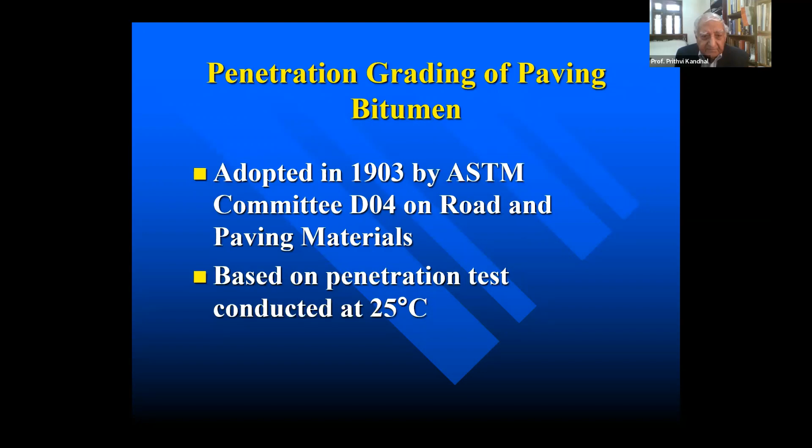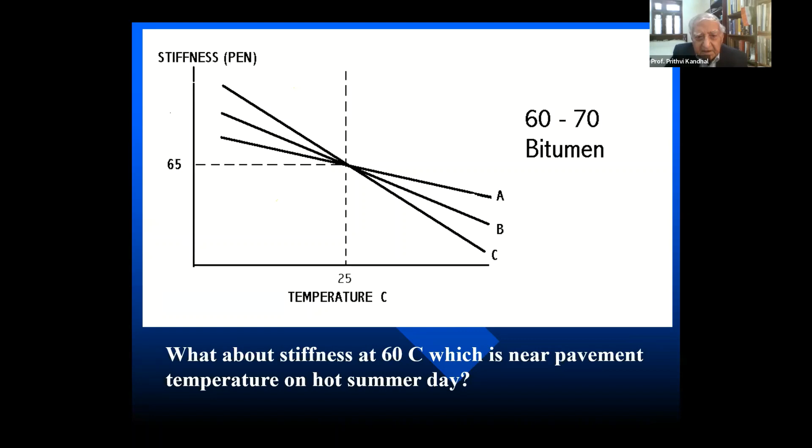So in the late 1960s, the ASTM originally proposed these, let's say, viscosity grades. Here is the viscosity grade. So AC5, AC stands for asphalt cement, which we don't use in India. In India, we use bitumen. So AC5 has a viscosity of 500 plus minus 20%, which gives us a range of 400 to 600.

AC10 has a viscosity of 1000 poises with plus minus 20%, which gives us a range of 800 to 1200. And AC20 is 2000 poises plus minus 20%, 1600 to 2400, and AC40 is 3200 to 4800. So again, you can see here there is a gap between these viscosity grades. So there is no dispute, no problem.

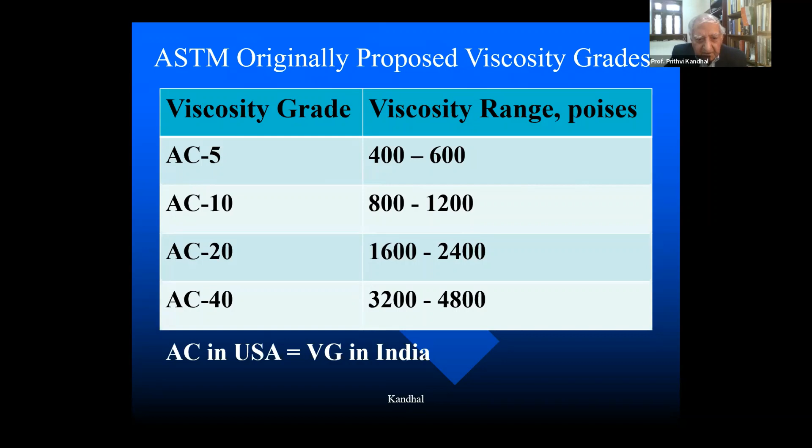So here you can see what happened after the ASTM originally proposed these grades, AC10, 20, and 40. There were 4 states in the southeastern United States right here, Florida, Georgia, Alabama, Mississippi. Now, they were supposed to use AC40. In India, we will call it VG40. We didn't want to use the term AC, we just said VG, viscosity graded. So they did not want to use AC40, whereas AC20 was for most of the United States.

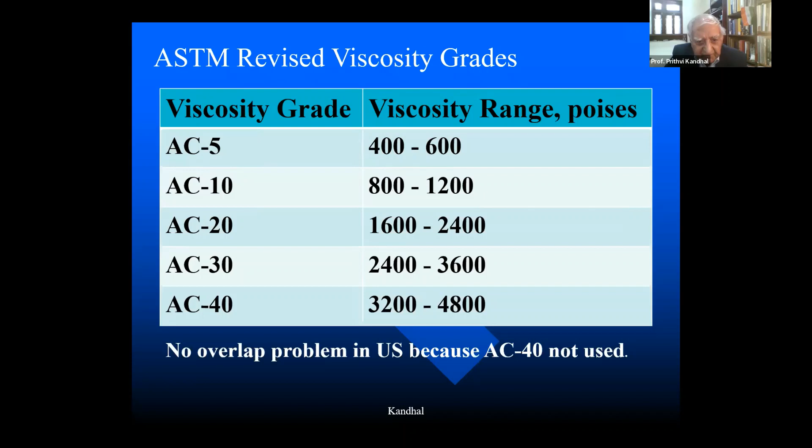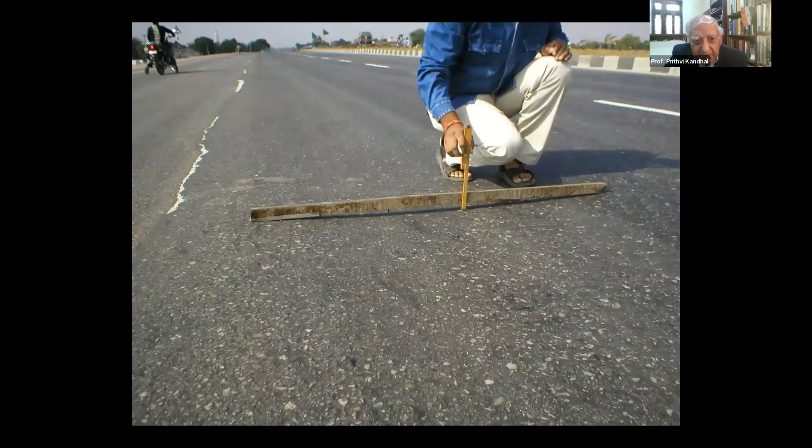Next. Okay, here you can see there was a lot of rutting. Rutting was as much as 40 millimeter in many of the cases. So in this lane, it's being measured up to 40 millimeter. Next.

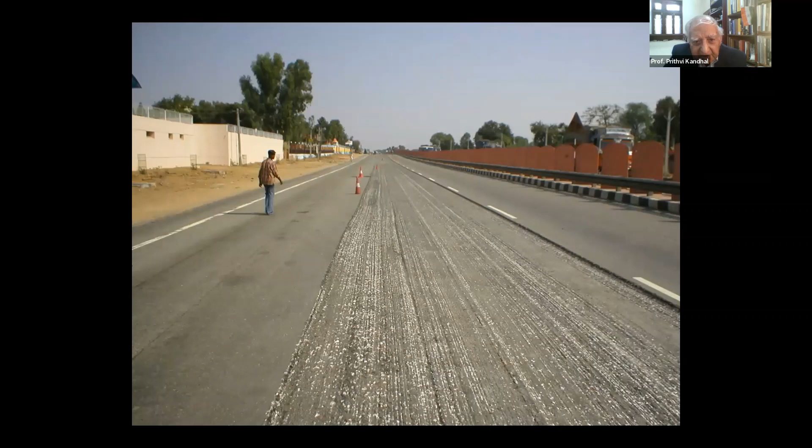Here you can see because of the rutting, this middle lane of the 6-lane highway, there are 3 lanes on this side, has to be milled off. In India, unlike other countries, most of the heavy traffic, buses and trucks, ply in the middle lane, which they are not supposed to do. So that's where the problem always occurs. So in this middle lane, this rutted pavement was milled off and then replaced. Next.

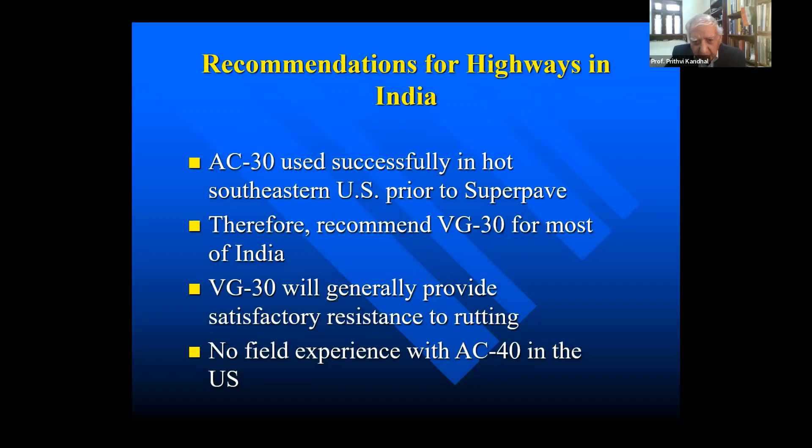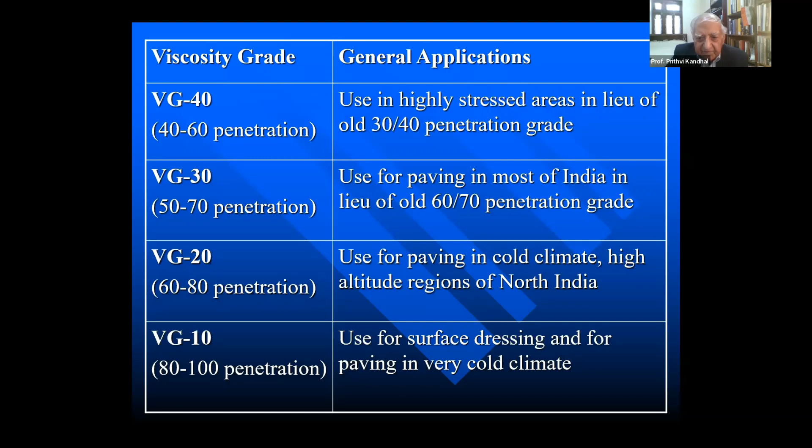So this is what I recommended here: viscosity grades and general applications. I recommended for India that VG40 can be used in highly stressed areas in lieu of 30-40 penetration grade. VG30 can be used for paving in most of India in lieu of the old 60-70. VG20 is used for paving in cold climate, high altitude regions, and VG10, which replaced 80-100 penetration, is used for surface dressing and for paving in very cold climate. So that's what I recommended for the viscosity grading used in India. Next.

So that happened in 2006. Then came a shocker in 2012. The Indian Roads Congress revised their guidelines for the design of flexible pavements. It's called IRC 37. It was revised in 2012, and I'll now talk about what the revision was and what kind of impact it had on the viscosity graded bitumen.

Next. So in IRC 37, they included a table of VG grade versus Resilient Modulus MR. Now the Resilient Modulus is used for structural design of bituminous pavement, especially the thickness of the bituminous pavement. Higher the Resilient Modulus, lower is the thickness of the bituminous pavement.

So in that table, which they came up with for the first time in 2012, they said the Resilient Modulus MR of mix with VG30 is 1,700 MPa or megapascals. The mix with PMB is 1650. The PMB is always lower, although it has much more strength than the neat bitumen. Mix with VG40 was 3000 MPa. So look at the difference here, VG30 and VG40.

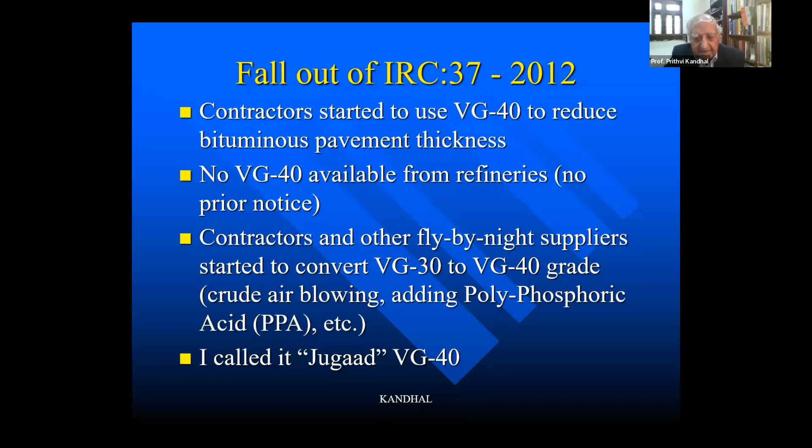So because of that, the National Highway Authority of India had an open house on this IRC 37 design of flexible pavement, and they invited me to make a presentation because I was resisting quite much, making a lot of hue and cry. So I recommended to immediately stop the use of Jugaad VG40, permit only the refineries which produce VG40, and I also made a case to not base Resilient Modulus on viscosity alone.

It is technically incorrect. There are 6 other mix variables, such as amount of fines, bitumen content, air voids, etc., which can overshadow the effect of viscosity on MR, Resilient Modulus. The table which I showed you was technically incorrect, but they went ahead anyway, and they are still using it. Next.

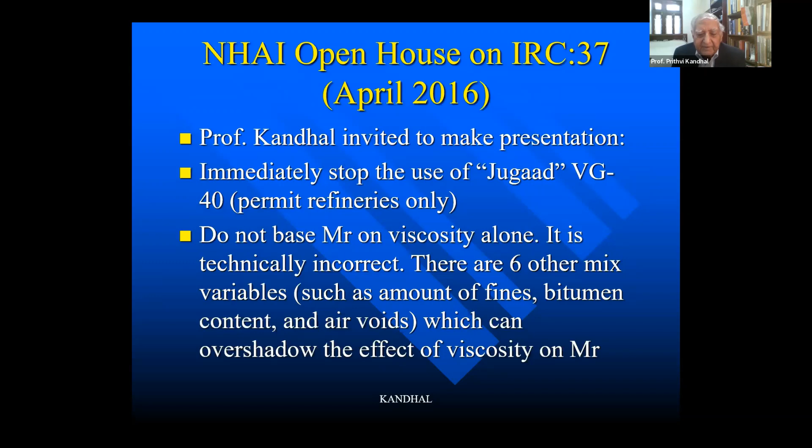So I also recommended to use only one Resilient Modulus of 1700 megapascals for all binder types. That was the same as we were using before 2012, and is also used in the US. They also use the same one Resilient Modulus. So I said only one. Don't differentiate between VG30 and VG40 or polymer modified bitumen. I also raised the point that there are only 2 or 3 laboratories in India which can actually determine the Resilient Modulus, which is a very complex ASTM test.

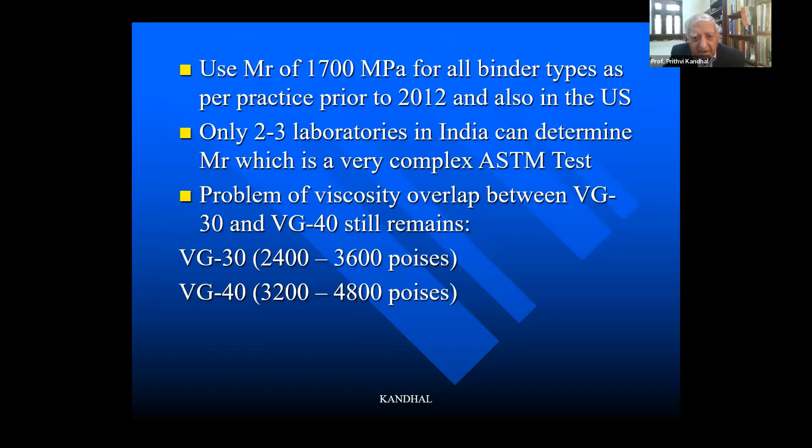And then we have the problem of viscosity overlap between VG30 and VG40. As you can see here, the VG30 has a range of 2400 to 3600, VG40 is 3200 to 4800 poises. So there can be a bitumen which will satisfy both VG30 and VG40. So how can you use different Resilient Modulus for VG30 and 40? So I raised that point quite much in that open house. Next.

So I just want to show you this slide again, that VG30 is 1700 MPa, VG40 3000. Lot of difference here, and which is technically incorrect. Next.

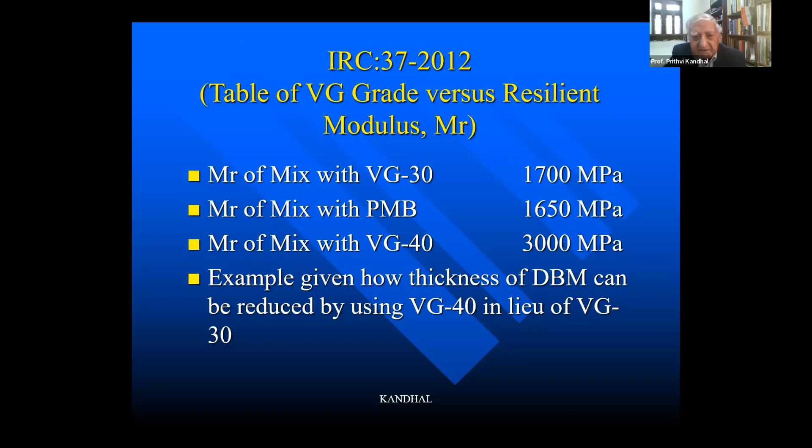So the current situation in 2022 is that we are still living with the viscosity overlap of VG30 and VG40. So how can we use different Resilient Modulus? Even if there is no overlap, if the viscosities are very close, it still renders the Resilient Modulus values of no value. Unreliable, impractical resilient modulus values are being used for pavement thickness design.

So the bituminous pavements are being under designed in terms of thickness right now, and that's happening in India. We are not doing any justice to the next generation by under designing our bituminous pavement, which might develop fatigue cracking in the near future. Next.

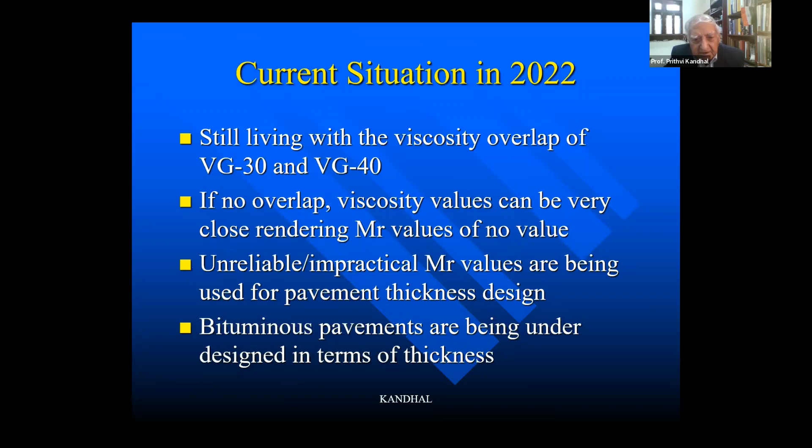So my recommendation was that let's use VG40 bitumen, because after 2012 we have used VG40 quite much on many projects, including national highways, and we have not seen any problems. And also eliminate the use of VG30 and use only VG40 instead for India's hot climate.

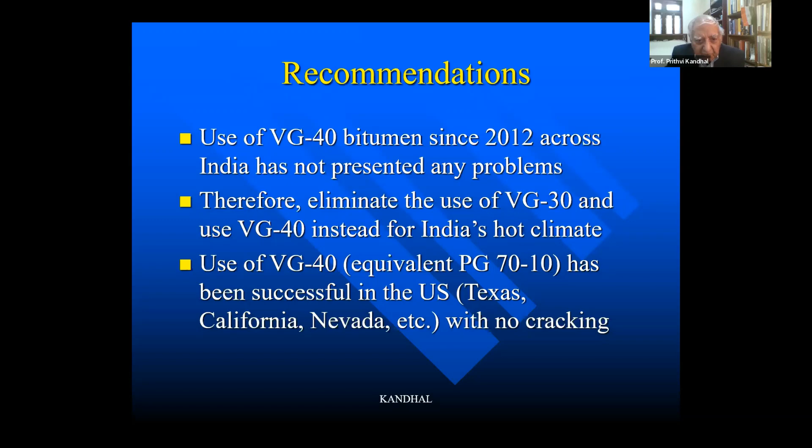Use of VG40, which is equivalent of PG70-10, has been successful in the US after Superpave, because it has been used in Texas, California, Nevada, in the hot regions of these states with no cracking. So now we have confidence, because PG70 has been used in the US without any problem, and that's equivalent to VG40. Next slide, I will show you the equivalency. Next.

So here in this map, you don't see clearly the yellow dots. These are the yellow dots here. The yellow dots represent the southern United States with a pavement temperature of around 70 degrees Celsius. So in these areas, we would use 70-10 in the hot areas, although they are still using like VG30, or they show this PG grade in between, which is not correct. So anyway, in the southern United States, they are using PG70-10. Next.

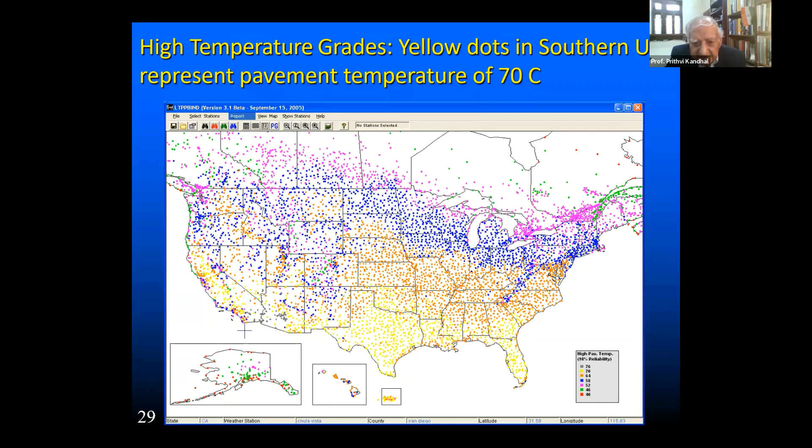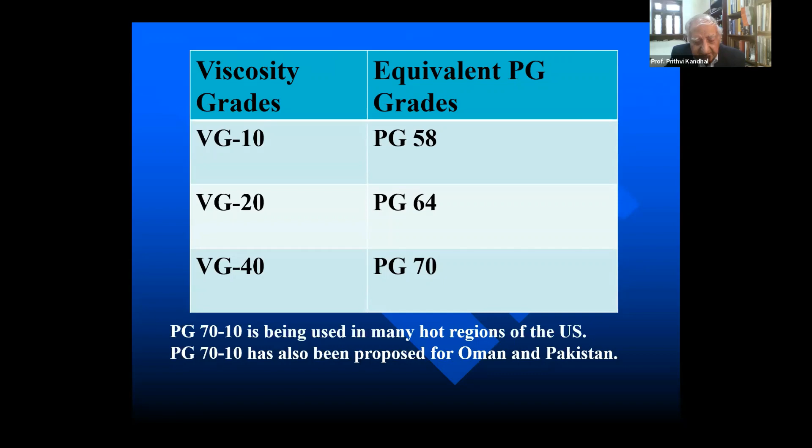So these are the proposed viscosity grades in India. I have eliminated the VG30 here. You can see here we have VG10, VG20, VG40. VG10 used for surface dressing and recycling. In hot mix recycling, we have to use a softer grade of bitumen. VG20 used in cold climates such as northern India, like in Jammu and Kashmir, and also for recycling.

VG40 used in most of India. So that's what I'm proposing. I've eliminated VG30, which is unnecessarily giving problems. And VG40, as you'll see in the next slide, we have more confidence in VG40 now. Next.

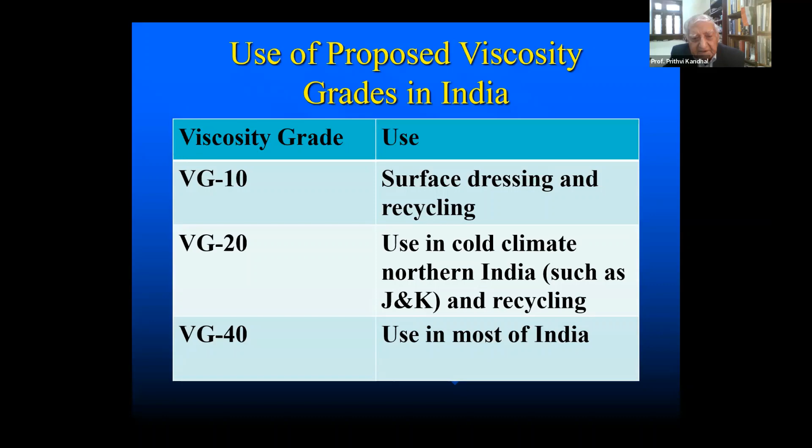So hindsight is always better, as they say. I could have proposed VG40 for most of India in 2005 in lieu of VG30. However, I did not want to take a risk with VG40 at that time due to lack of field experience with AC40 in the United States. There was no field experience. They were saying it might crack, so I didn't want to take that risk.

So now VG40 has proved itself in India as well as in the hot climatic regions of the United States, where PG70-10 is used, which is equivalent to VG40. So now, better late than never. That is my thrust. Next slide.

What you see here is the government is like a camel. This camel doesn't want to move. If it moves, it will move very slowly. So any change in this viscosity grading, where I'm recommending that we take out the VG30 and use VG40 for most of India, which I made a very good case for, and we have good confidence now in VG40. So I hope somebody will take this thought forward and won't be like this camel which doesn't want to move.